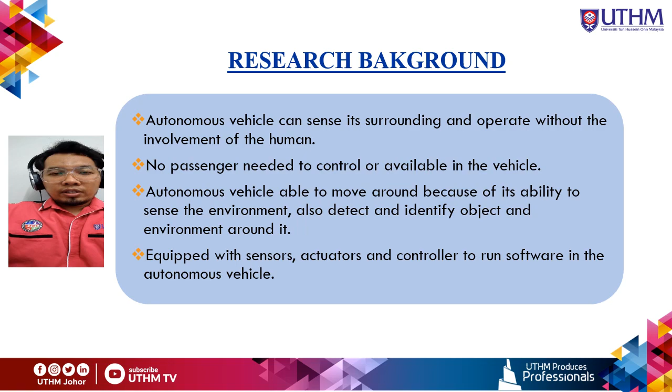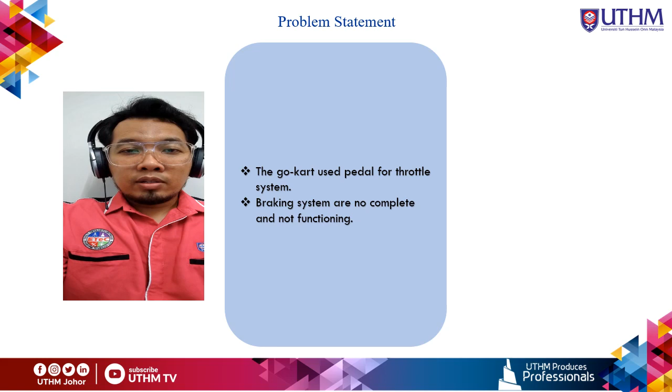Next is the problem statement and objective. For the problem statement, the go-kart still uses the pedal accelerator for throttle system, and for the braking system it is not complete and not functioning. So both systems need to be replaced to add the new autonomous system on the go-kart.

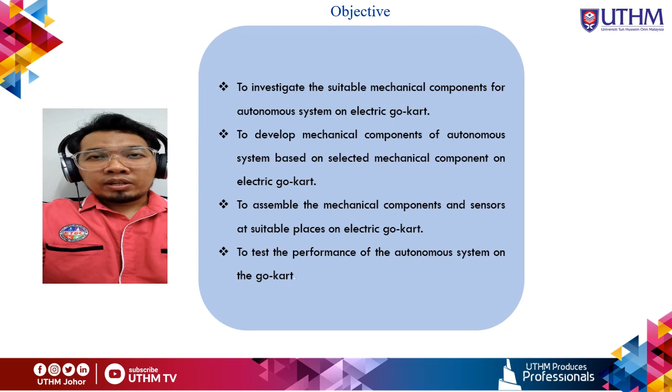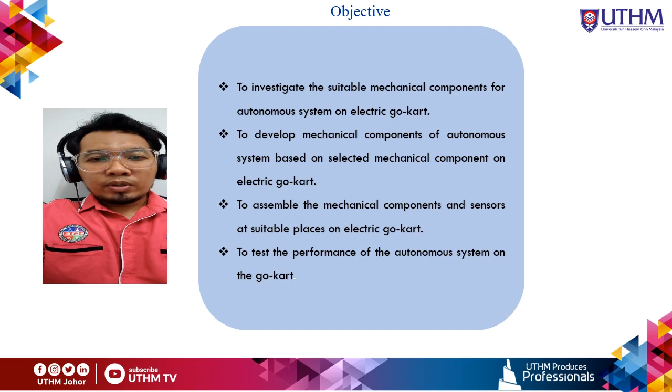The first objective is to investigate the suitable mechanical component for autonomous system on electric go-kart. Second is to develop mechanical components of autonomous system based on selected mechanical component on electric go-kart. Third is to assemble the mechanical component and sensors at suitable places on the go-kart. Fourth is to test the performance of the autonomous system on the go-kart.

Next is the scope of study. My first scope focuses on mechanical components such as servo motor, potentiometer and mechanical disc brake. Second scope is the functionality of a brushless DC motor, which depends on servo motor SG90, a 10,000 ohm potentiometer and the Arduino Uno.

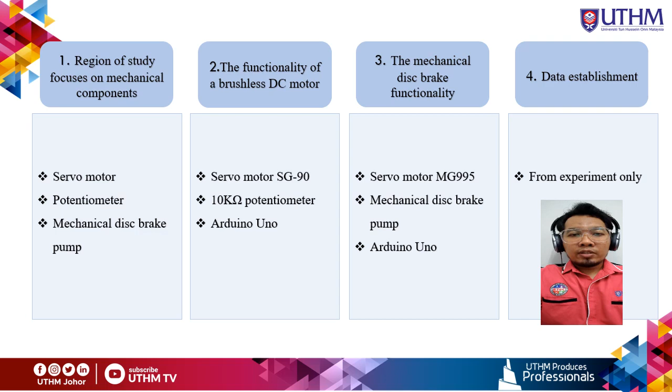The third scope is the mechanical disc brake functionality, which depends on servo motor MG995, the mechanical disc brake pump and also the Arduino Uno. My last scope is that all data establishment is from experiment only.

Next is the literature review. Autonomous system contains 6 levels of automation, starting from level 0 until level 5. Level 0, which is no automation, is where the driver completely takes control of the vehicle.

Next is level 1, driver assistance, where the acceleration and braking system can be automated. Next is level 2, partial automation.

The system is able to change lane or stay in lane, but if it detects any object in front, the steering input will go back to the driver. Next, level 3 is conditional automation, which can detect and recognize traffic signs and traffic lights.

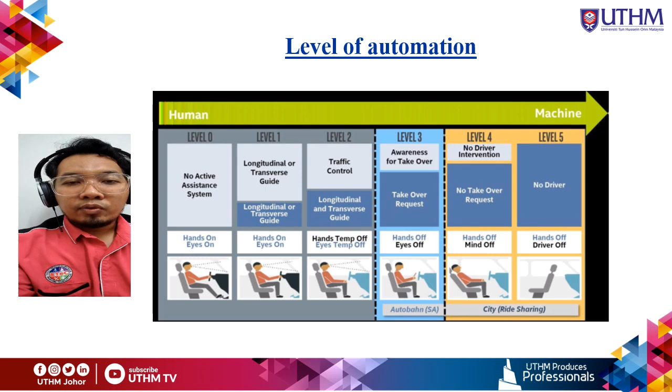Level 4, high automation, means the driver is not required to monitor traffic in safe condition, but if the system detects any object within its surrounding, the driver still needs to take charge of the vehicle again. Lastly, level 5 is fully automation, where all functions are fully automated and controlled by the system.

Next is the servo motor. A servo motor is a type of motor that works with a servo drive, and is an essential component of a servo system. It typically includes both a load driving motor and a component for detecting position, such as an encoder. The servo motor uses feedback from the encoder and the set goal to precisely control machine operation by adjusting the control quantity such as position, speed or torque.

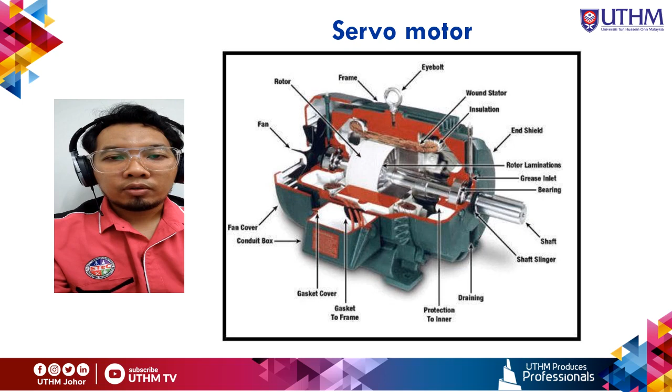Next is the potentiometer or pot. It is a type of resistor with a sliding or rotating contact that can adjust the voltage division between two of its terminals. It is commonly used in electrical devices like audio equipment and volume control, and is not typically used to directly control large amounts of power, as the power lost by the potentiometer and the control load would be similar.

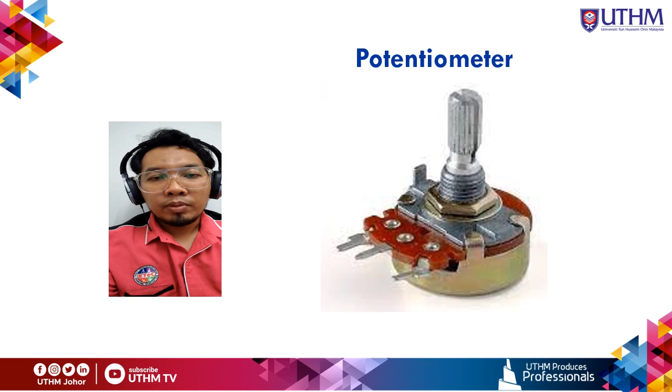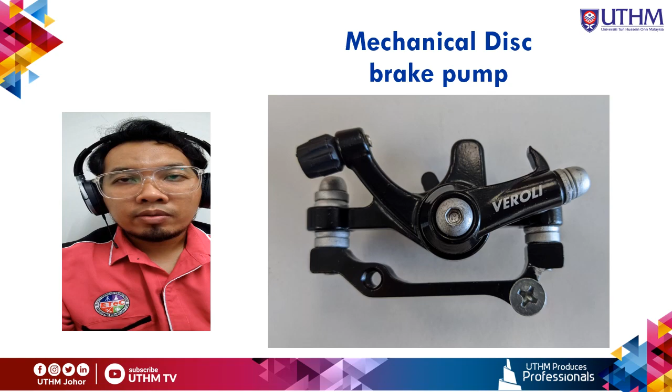Mechanical disc brake uses a simple cable tension system to engage the calipers, which push brake pads into the rotors to produce deceleration. This type of brake is known for its reliability and ease of use. Good quality metal or sintered brake pads are easy to replace and have a long lifespan, lasting more than 1,000 kilometers. Mechanical disc brakes are best suited for applications that require static braking that can be manually applied.

Next is the methodology of the experiment. As shown in the slide is the flowchart of the experiment.

It starts with start, and then the introduction. Next is the literature review. Then the equipment of experiment. Next is the placement and connection of the equipment on the electric go-kart. Then is the test procedure.

If the test procedure succeeds, then the data will be collected. If not, the placement and connection of the equipment needs to be checked and improved if there is a problem.

After data collection is the analyzation and discussion, and next is the conclusion and final report, and then is the end of the experiment.

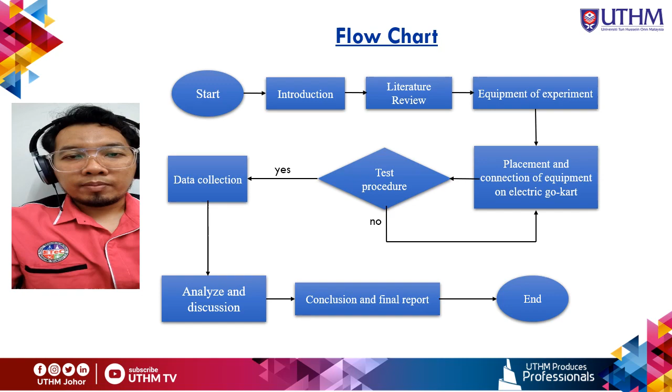Next, for the equipment of the experiment. The main thing used in this experiment is the electric go-kart, which has been made by the previous final year student for their final year project.

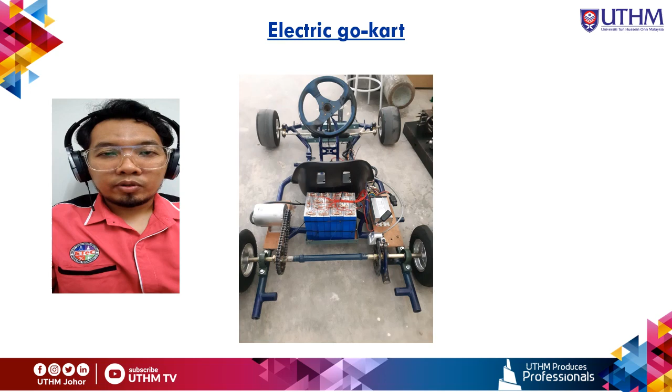Next is the other components used in the experiment, which is the ultrasonic sensor, then Arduino Uno, then the Toto Link power bank for powering the Arduino Uno.

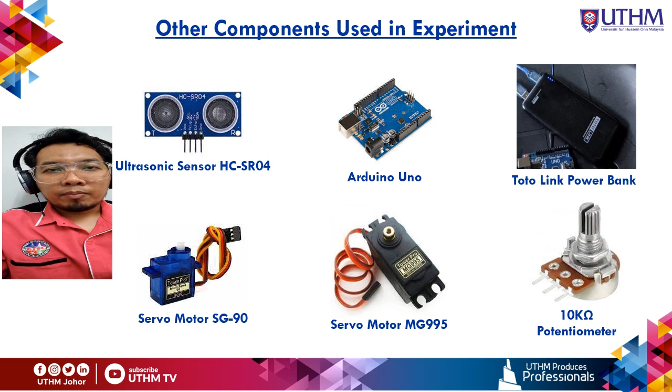Then is the servomotor SG90 that will link with a 10,000 ohm potentiometer to accelerate the go-kart. And then is the servomotor MG995 that will link to the Veroli rear mechanical disc brake pump for the braking mechanism.

For the placement and connection of equipment on the electric go-kart, first the sensor is placed on the front of the electric go-kart. Then the combination of servomotor SG90 and potentiometer is on the right side of the go-kart.

Next is the Arduino Uno, which is placed on the center of the go-kart. And lastly, at the back side of the go-kart is installed the mechanical disc brake pump and also servomotor MG995, which are connected with the brake cable.

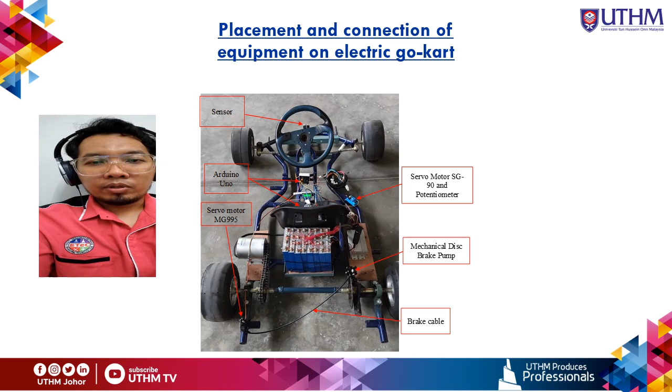All the experiments have been done in Block D of University Tun Hussein Onn Malaysia, Pagoh.

For the stop test of the go-kart, it is set at 48 degrees of potentiometer, which indicates the lowest speed of the go-kart. Then the sensor is set at 1 meter for it to sense and make the motor at the go-kart stop, and then for the braking to take place.

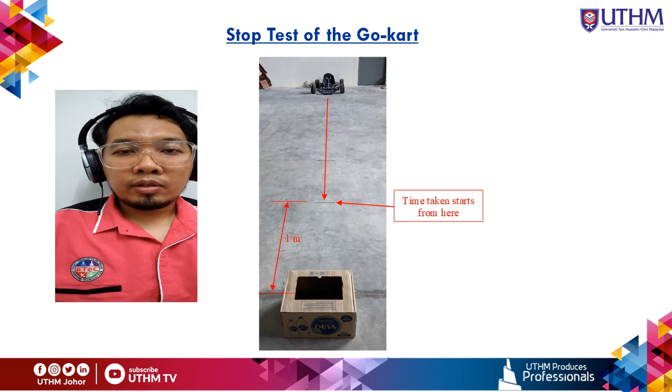There is a line which indicates where it should be stopped. If the go-kart is stopped near the line, it is good. But if the go-kart stops beyond the set line, the data will be obtained and the margin error will be calculated.

Next, there are two formulas that will be used in this experiment. The first formula is the torque of the servomotor, to calculate the torque needed to rotate the potentiometer and to pull the brake cable. Next is the error percentage of the measured distance and the real distance that the go-kart needs to stop.

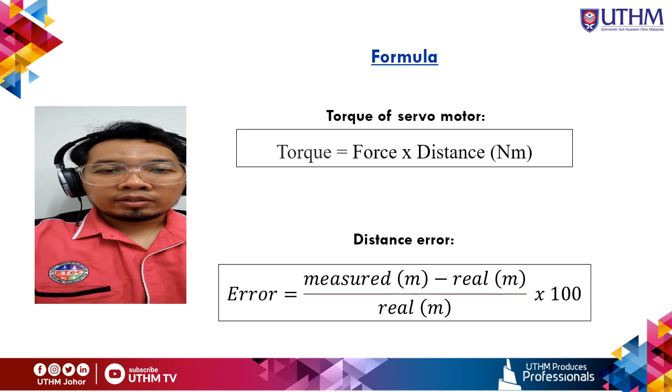Next part of this presentation is the result and analysis. For the torque calculation, the servomotor SG90 and servomotor MG995 have been calculated, and it is enough to rotate the potentiometer knob and also able to pull the cable brake, as the SG90 is strong enough to pull the light potentiometer knob, and the MG995 is more than enough to pull the brake cable.

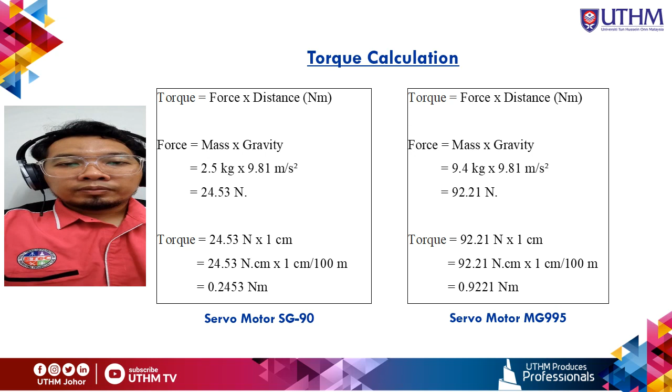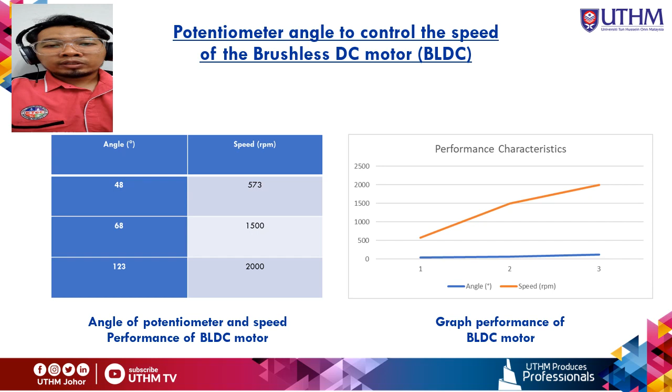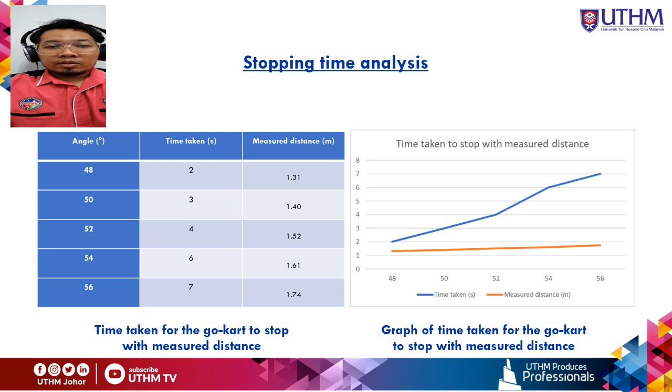For stopping time analysis, the graph shows that the time taken for the go-kart to stop with measured distance increases as the speed of the go-kart increases.

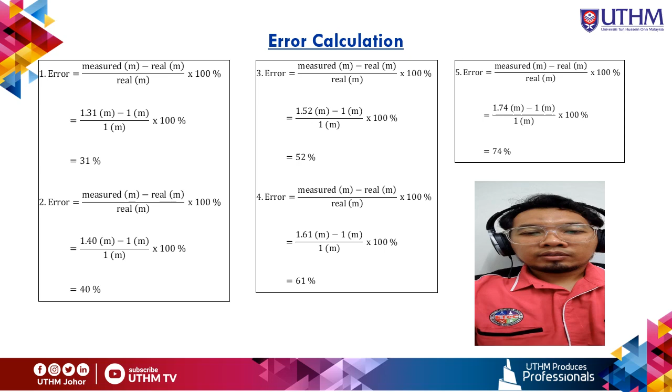Next is the error calculation. There are 5 calculations that have been made, and the data has been converted into a table, which has made a graph. As the speed of the go-kart increases, the time taken for the go-kart to stop also increases, and the distance that the go-kart stops also increases.

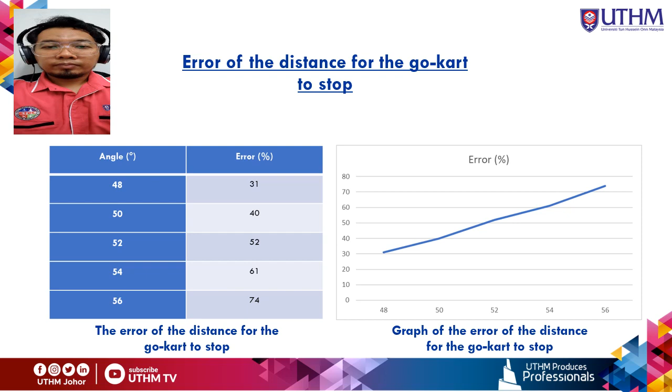In conclusion, the experiment has been successfully concluded and all the objectives have been met. All the mechanical components were implemented and successfully mounted on the go-kart. The autonomous system was tested and found to be working well. The combination of servo motor and potentiometer is able to control the acceleration and also the braking.

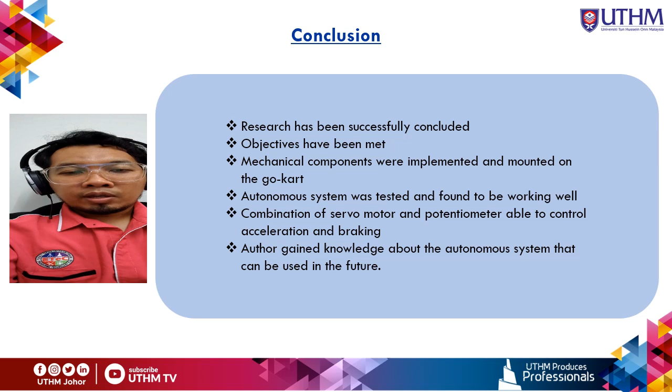In this experiment, more knowledge has been gained, and this can be used in the future.